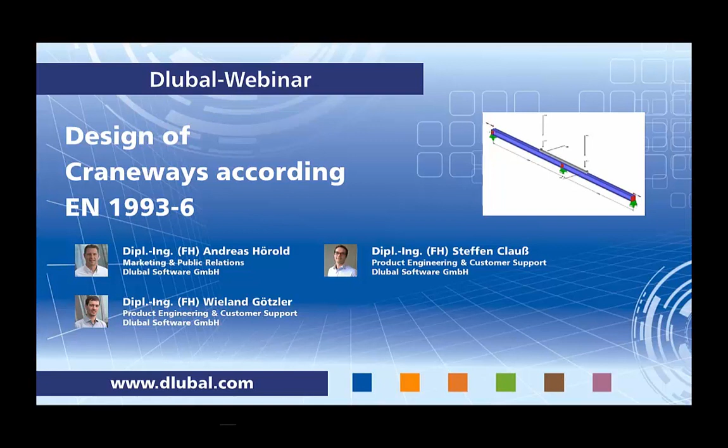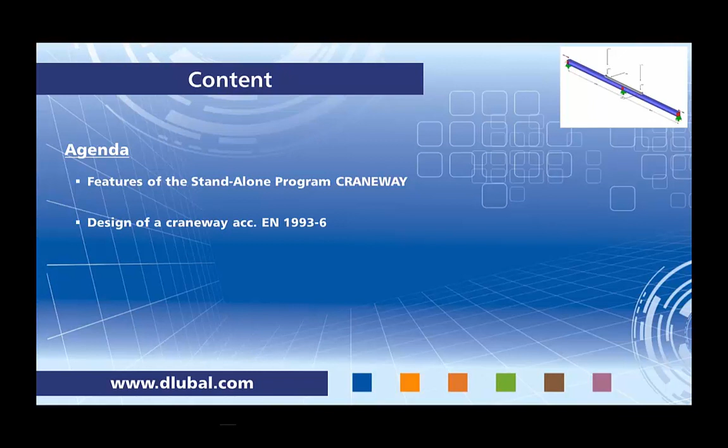Today's content: in the first part I will show you the features of the standalone program Craneway, followed by the design of a craneway according to Eurocode 3 Part 6. So first let's talk about the features of the Craneway program. Craneway is a standalone program, which means that it's completely independent from other programs like RFEM or RSTAB. You don't need to define different parts of the model. You just have to define the craneway itself, and this leads to a fast and comfortable modeling and design.

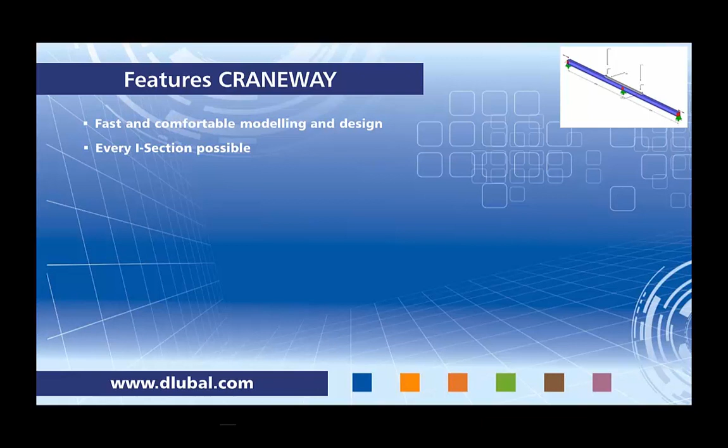You can use every I-section, like welded or rolled I-sections, and you can strengthen them by channel profiles or angles. You can define up to 3 cranes with a maximum of 20 crane axes. And one of the biggest advantages of the standalone module Craneway is that you can have an automatic combination of load cases for different design situations like fatigue, ultimate limit state, or serviceability limit state.

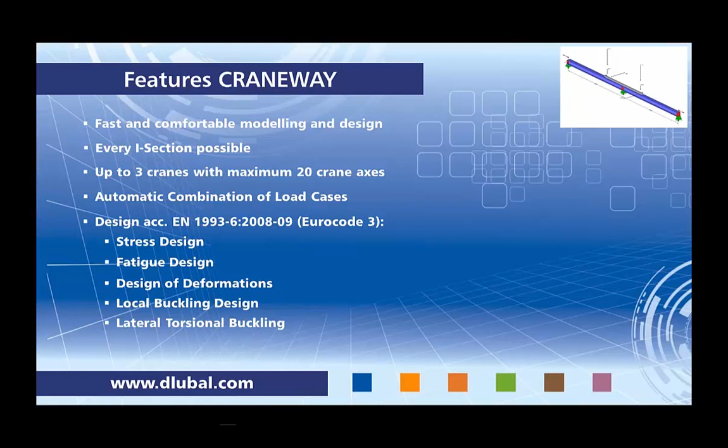The design is according to Eurocode 3 Part 6, which includes the stress design of the crane, fatigue, design of deformations, as well as the local buckling design and the lateral torsional buckling design according to the P-delta method or second-order theory, including the warping of the cross-section. Another big benefit of Craneway is that you can have a presentation of the results in the graphic, like deformations, bending moments, as well as a full printout, which makes a provable static calculation of the craneway possible.

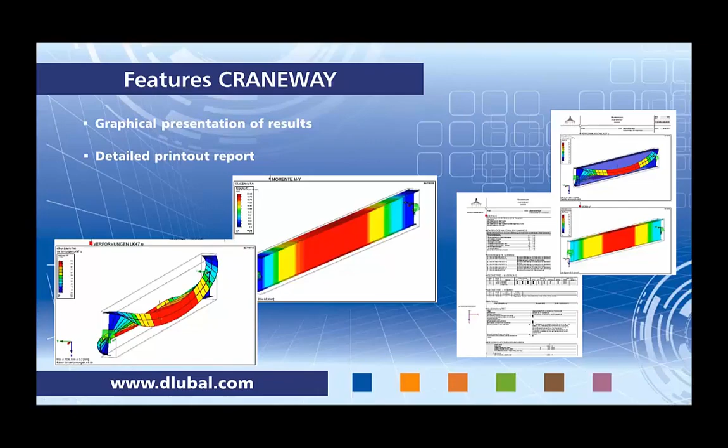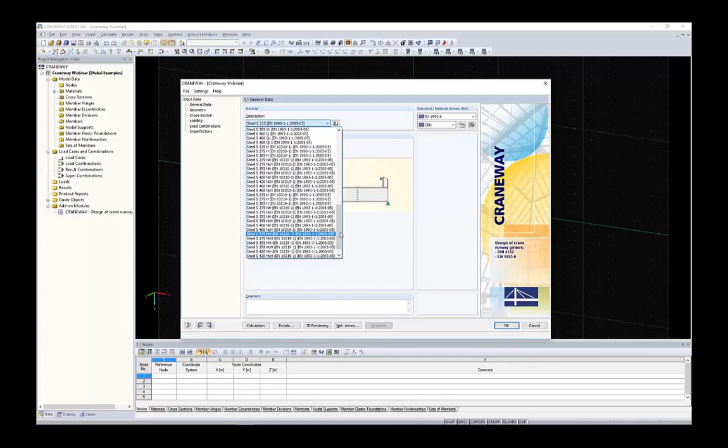Now we will just move on to the Craneway program itself. It might look quite similar to you if you are already using RSTAB or RFEM. So in the first step, I will just define a model. In this case, let's say I want to define Craneway webinar. And in the first mask, you have to define which material you want to use. I will just use S355. But as you can see in the list and also on the link, you can use a material library, as you already might know from the other programs. You can define a new material if you don't find the correct one for your calculation. But in this case, I will just use the S355.

You have a design possible according to DIN 4132 for Germany, and according to Eurocode 3 for the European Union for several national annexes. And if your national annex is not available in the module, you can easily define a new one and change partial safety factors according to your needs. Today I want to define a bridge crane, and I want to define it according to CEN, which means the formulas and the variables which are included in the main standard and not in the national annex.

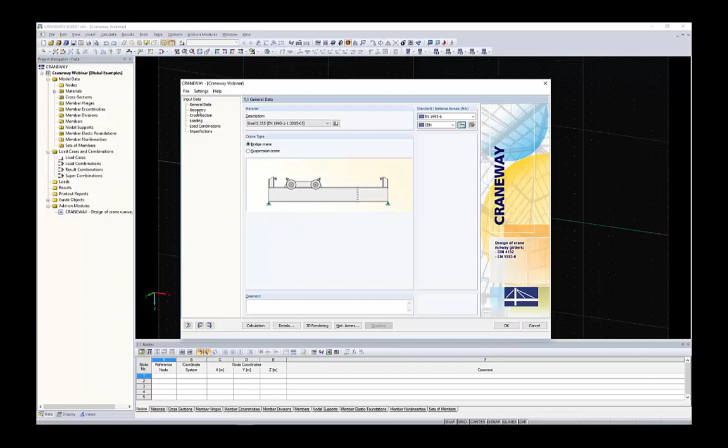In the next step, I have to define the geometry of the craneway. As in the main view in RFEM or RSTAB, you can easily rotate, zoom in, zoom out as you wish, and check your structure. I like to work in isometric view. And today we have an example like a 28-meter craneway. And on the bottom I have to define the supports: we have an intermediate support at 14 meters length and at the end of the craneway at 28 meters.

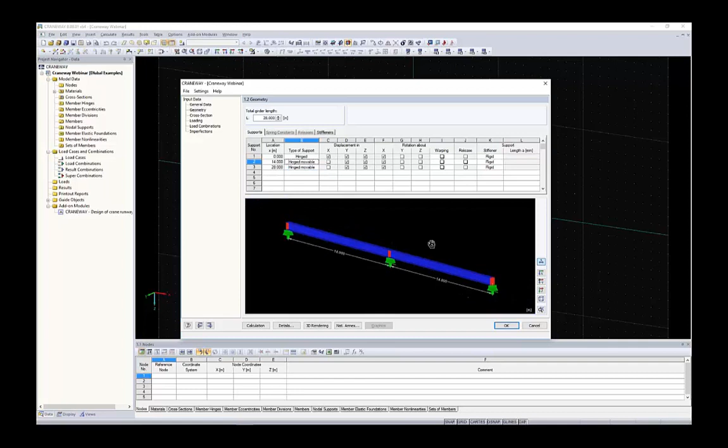There are several standard types of supports like hinged movable as an intermediate support, and it will give you the automatic definition of the displacements and rotations, which is disabled at the moment. But if you want to define a full user-defined support, you can easily use user-defined, and you have access to all the degrees of freedom. You can also use just an intermediate support on the upper flange, and you can check it in the graphic. In this example, we just have hinged movable like this, and we want to define a release in the middle of the craneway like this.

In the next mask, you can also check the releases. If you define a user-defined release, you can also have access to the other degrees of freedom there to, for example, define a shear hinge or just a normal hinge as you wish. I will just use the standard hinge in this example.

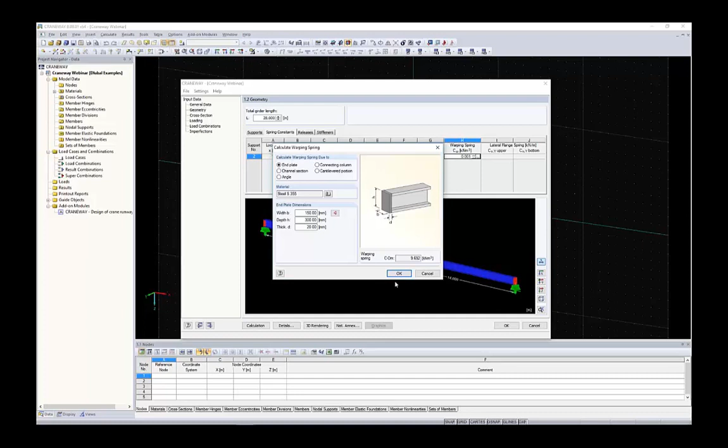You can also use warping supports or hinges as stiff, or you can also define springs in the mask there. And with the detailed dialog there, you can also let the module calculate spring stiffness for warping. In this example, we want to keep it simple, so we don't take the warping into account.

Let me just show you the stiffeners. The stiffeners there are not for the calculation of the internal forces, but they will define the intermediate panels for the design of local buckling. So in this example, I want to have 6 intermediate panels on both sides as regular, or you can even use user-defined and choose whatever distance you want.

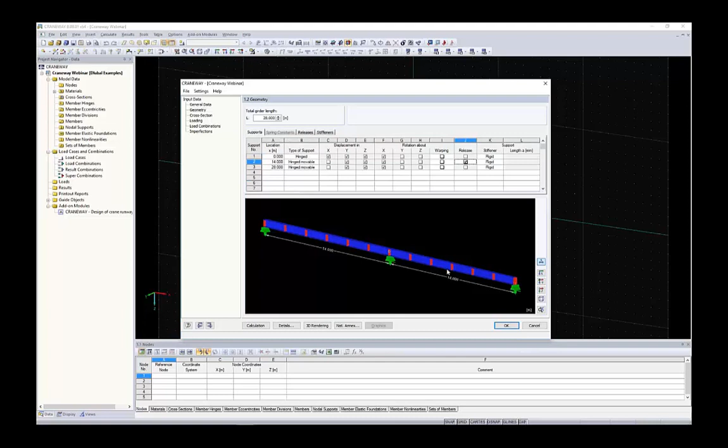Okay, regular 6 panels, and that's okay with the definition of the craneway itself. We can just continue to the next dialog, which is cross sections. There, in the first step, you can choose between rolled or welded sections.

Let me take a look at the rolled sections. You have a filter on the left side for several manufacturers and standard groups. That means you have quite a big library of possible I-sections, for example, ArcelorMittal or standard sections, British Steel, for example.

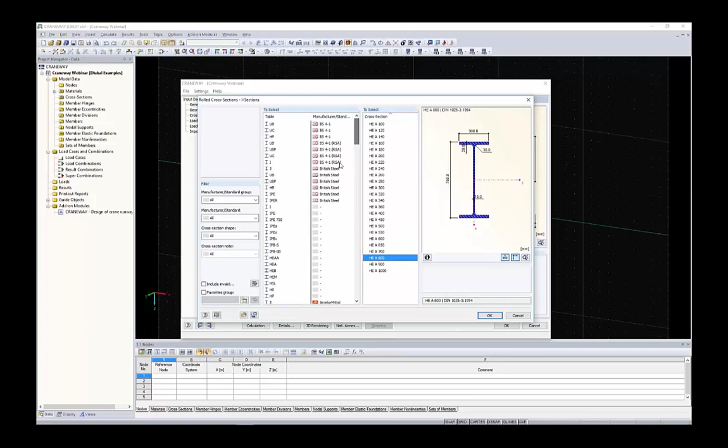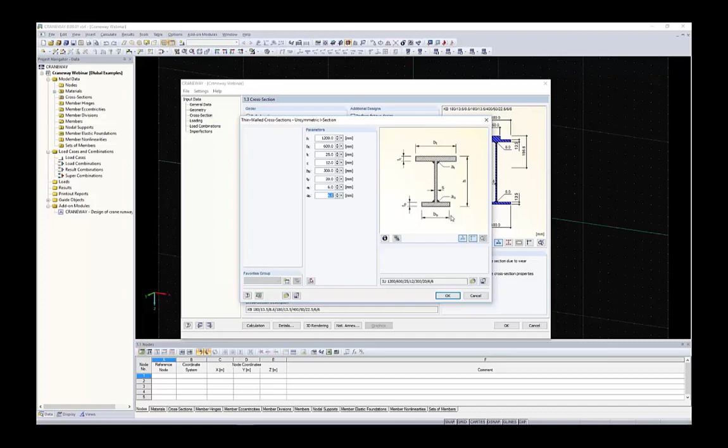In this example, I want to use a welded section, which is quite easy to define. You just have to define these dimensions there, and the example is 1200 millimeters high, 600 millimeters is the upper flange, 12 millimeters as the web. The width at the bottom is 300, 20 millimeters thickness, and the welds both are 6 millimeters. Okay.

The next is to define a rail section. You can use a splice, like a flat bar on the upper flange. As you can see on the right, you can also take a look at the cross section there. Define the splice, or in this example, I want to have an SA 75 section, like this one. Okay.

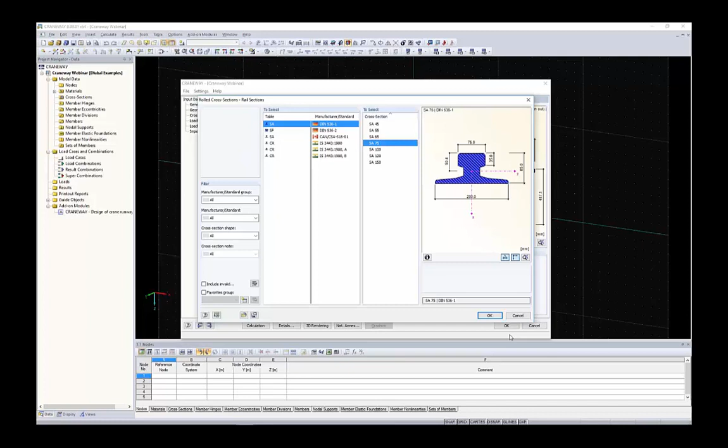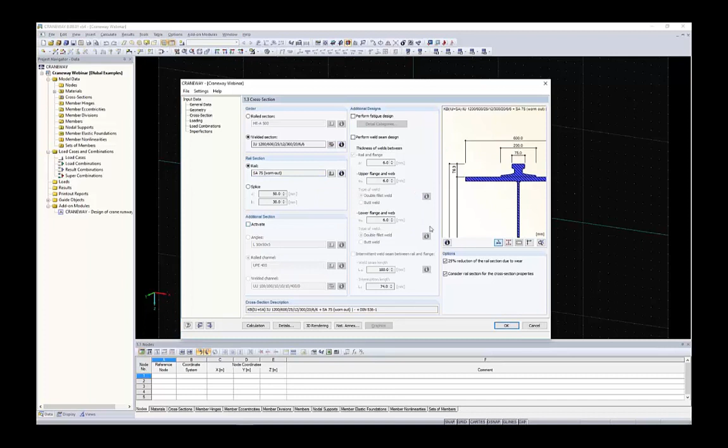On the bottom, you can define stabilizations or strengthening sections like angles on the flange, or rolled sections, which in this case is not possible for this section with a width of 600, but I can easily deactivate it and just continue with this one.

On the right side, you can also see that you can take the wear of the rail section into account, defined by the standard. As you can see, the section properties are modified automatically. You don't have to do anything. You get some info in the section of the rail.

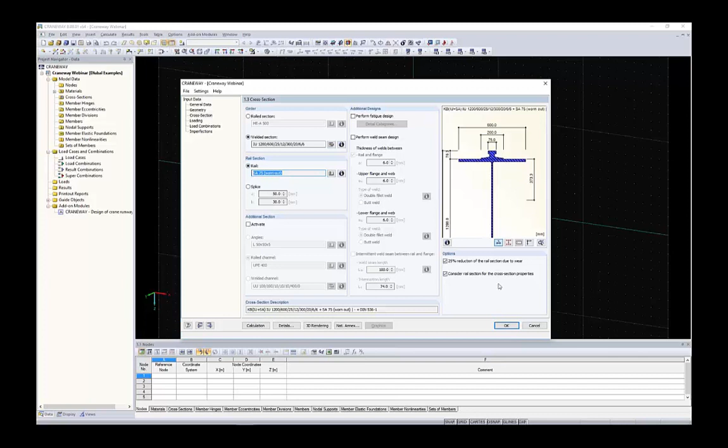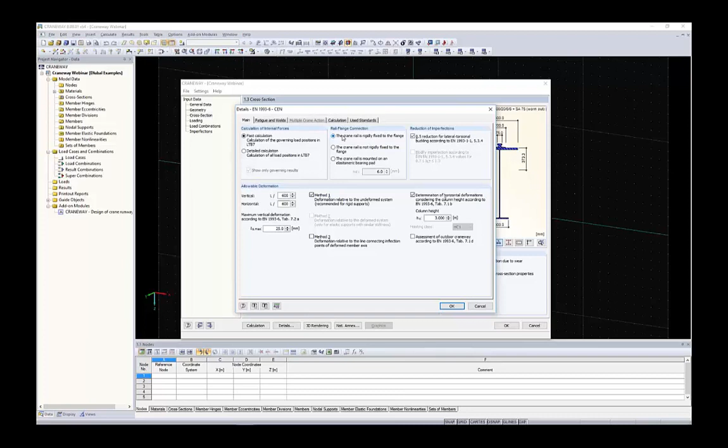And in this case, I have an elastic support under the rail, so I don't want to take the rail section into account for the section properties. I will just switch this checkbox off, and in the details dialog, in the middle of that, you can see that you can define the rail flange connection. In this case, as I said, I don't want to take the rail into account.

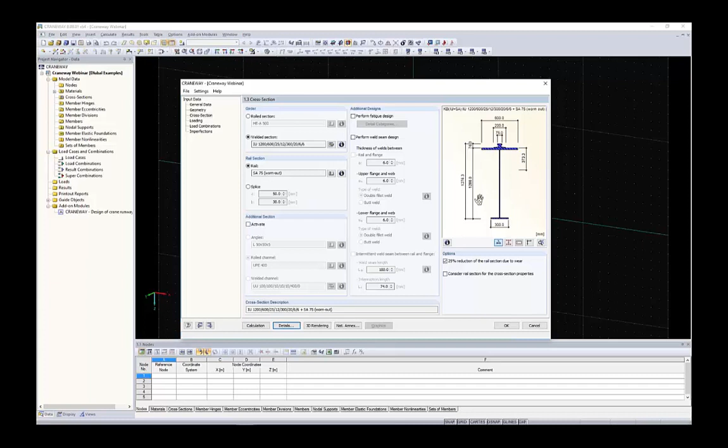That means, as I said, we have an elastomeric bearing pad with a height of 6 millimeters, which is fine. Okay. And with this definition, we can just switch to the next mask, which is the loading.

So on the top of the loading mask, you can define how many cranes you want to design on the craneway. In this example, it's just one. We have a girder buffer on both sides, and we want to design both girders. That means with maximum and minimum loading.

Crane description, this is what you usually get for the static calculation. That means you have a crane you want to take into account, and in this data sheet you will find all the loading, the name, and the S-class for this crane. For this example, I have, let me take a look, a 17 tons crane. The S-class is S5.

And there you can see the dynamic coefficients, which should be clearly visible in the data sheet of the crane, whether the loads you have to define there already include the dynamic coefficients, or they are without.

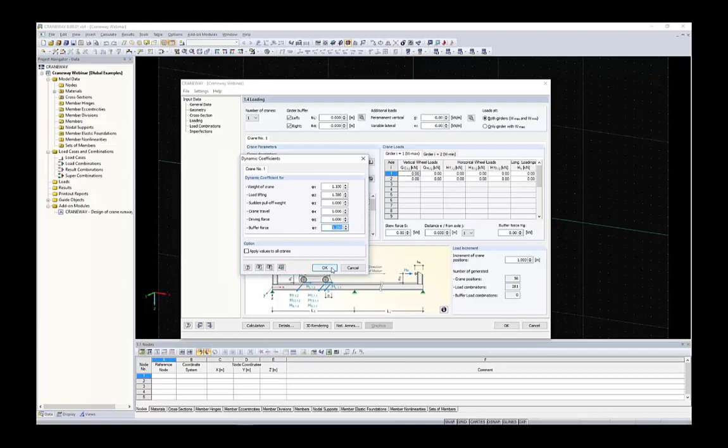If they are without the dynamic coefficients, you have to define it over there. So in this example, I have to define 1.1 as phi1 and 1.38 as phi2. The rest of the values are already okay, like this. And we have a crane buffer of 5 centimeters on both sides.

That means the crane can run from this length along the CRANEWAY. You will see this in the graphic later. We have 4 crane axes in this example, and the distances between the crane axes are 2 meters, 5.6 and 2 meters.

And the loading I have already prepared in a small Excel sheet. So I will just copy the loads from this sheet by selecting all the loads, selecting the cells, and Control V, paste the loads over there. We have a minimum load on girder 2, because I want to design both girders. And we also have an additional skew force, minus 20.1. Okay.

Now on the bottom you can see we have an increment of crane positions of 1 meter, and it means that we have 56 crane positions. And this leads to 281 load combinations. If you define, let's say, 10 centimeters, you get almost 2,000 load combinations.

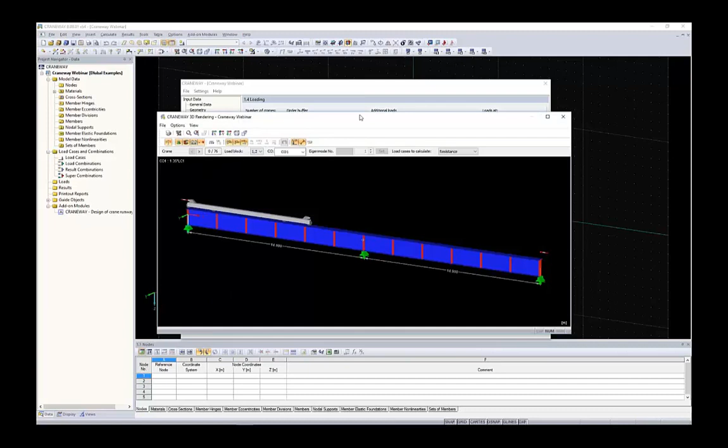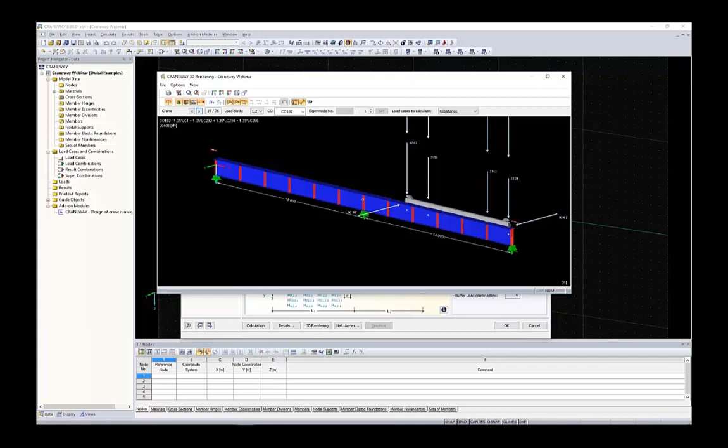And what does this mean? You can take a look in the graphic, the 3D rendering over there, and there you can check the definition of the crane. We have 4 crane axes with these distances, 2 meters, 5.6 and 2, and this is basically the calculation which is done later when you press the calculation button. The program will calculate all the load positions, load blocks and combinations according to Eurocode 3.

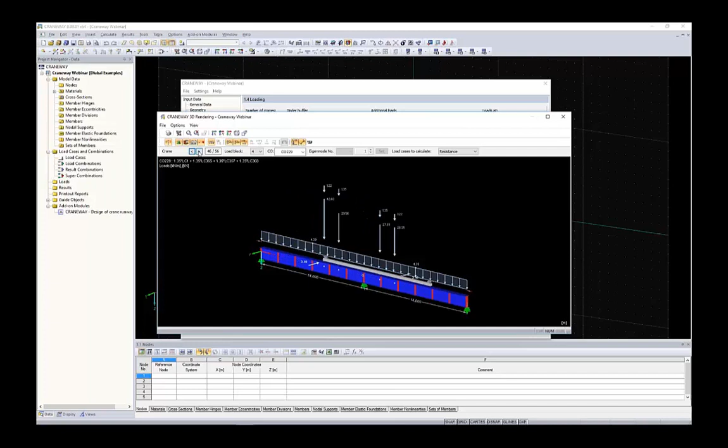When you just switch back and define a buffer of, let's say, 5 meters on the right side, check the rendering again, let me take a look, load block 1 and 2. This is this one, you can see there's a distance of about 5 meters on this side. The loads are not appearing above the support over there. But on the left side, the loads will be above the support at the X location of about 0 meters.

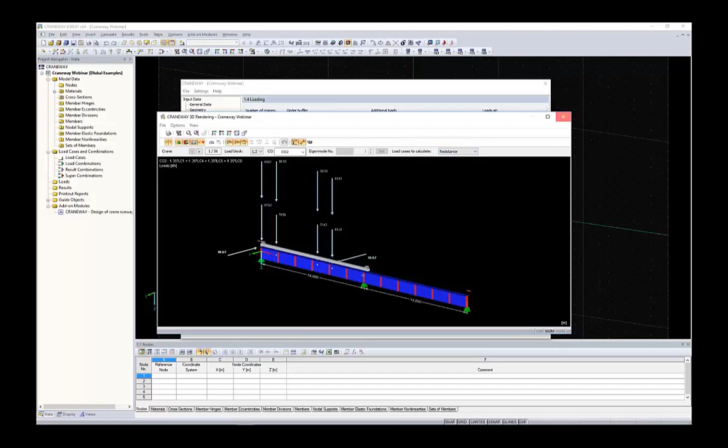So you can check all the load combinations and all the crane positions in the graphic, for the resistance, for fatigue, and for deformations. Let me just switch back to the crane buffer of 0.5 meters. This is also what you can use for the CRANEWAY if you have more than one crane and you want to keep the distance between the cranes. You have to define the buffers.

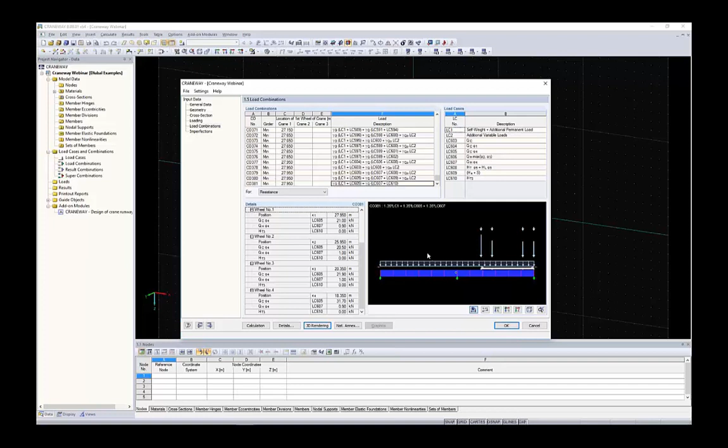So in this mask, I think we are finished and we can take a look at the load combinations. This is more like an overview for you. You can see that for the resistance, you have 381 load combinations with the partial safety factors, with the crane positions and so on. If you imagine doing this manually, it will be really time consuming to get all these load positions and combinations done. In this case, it's a very big advantage, I would say.

Let's take a look at the imperfections. Imperfections you can either define manually in the module, or the program CRANEWAY will define them automatically for you according to the buckling curve, and it will apply the imperfection according to Eurocode 3 automatically. So right now I can just run the design.

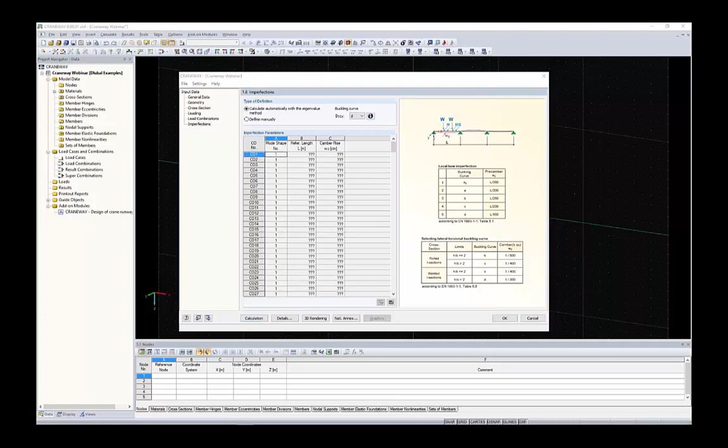It will take some time for the 381 load combinations.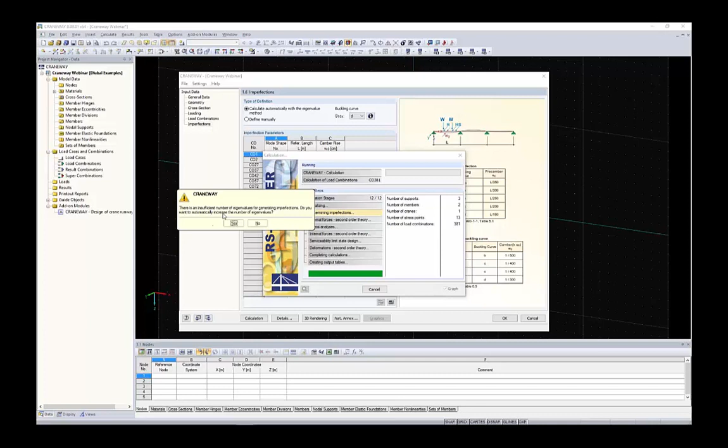There are 2 ways of calculation implemented in this program. You have a fast calculation, which means the design will run according to first order theory first, and then the worst load combinations and design situations will be designed according to P-delta or second order theory calculation method, including imperfections and warping of the construction. If you imagine designing all the design situations and combinations according to P-delta, including imperfection and warping torsion, it would be even more time consuming, and therefore we have a fast calculation and a detailed calculation. If there's a warning hint like insufficient number of eigenvalues, you get a warning hint, and in this case we want to increase the number of eigenvalues.

So this is the 12 design combinations we have. Of course, in this design situation 77, we have to design according to the P-delta method, but it's less than the 381 before.

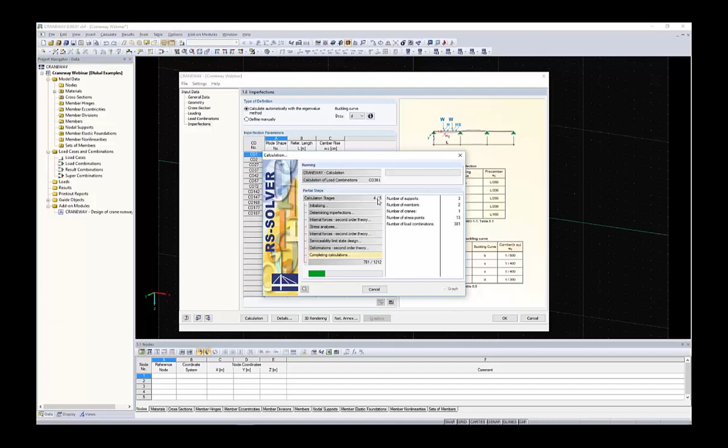Now the calculation finished, and you get a design summary like in other additional modules. For example, Steel EC3, you get results as a design summary, internal forces, support forces, stress analysis, and so on. So in the first step, we want to take a look at the stress analysis, which is fulfilled by this criteria.

We have a governing load combination 142, and you get a full stress design, for example shear stresses, sigma Z, sigma X stresses up to the equivalent stress, which shows that the design is fulfilled.

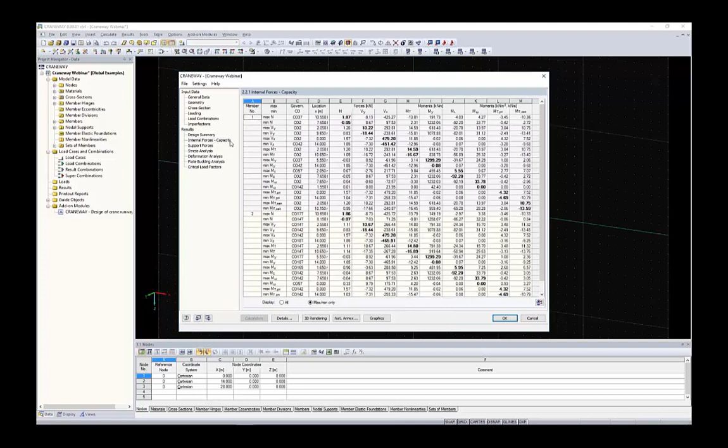You can also take a look at the internal forces as well as the support reactions. And with the File Export Tables button, you can also export these support reactions, for example, to have them for further work in RFEM or RStab.

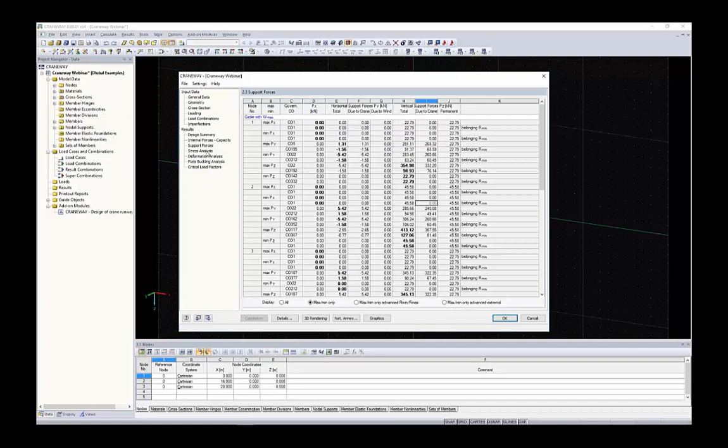You get also the plate buckling design, and what might also be interesting for you are the critical load factors for several load combinations.

The module also gives you the opportunity to get the welding and fatigue design, and this is what I want to perform now. So I switched back to the cross-section mask and activate fatigue design as well as the weld design. We define the weld thickness of 6 millimeters over there in the cross-section.

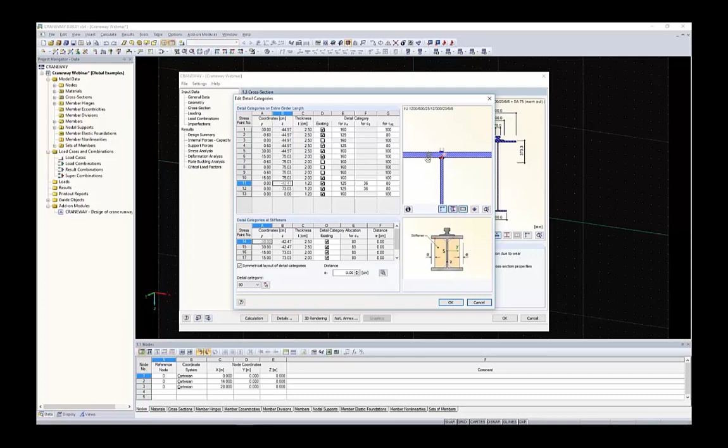First we want to try a double fillet weld. When you take a look at the detail categories, you get all the details for several stress points along the cross-section. You can also check the position of the detail category in the graphic.

When you click on calculation, you can see it's quite fast - it doesn't calculate the internal forces again. And you can see that it's quite overloaded. The fatigue design is about 400% now, and therefore I have to modify something.

You can also take a look at the overloading detail like sigma X, and when you take a look over there, it seems to be okay. But on the bottom you can see the sigma Z stresses, and this seems to be overloaded.

So therefore, over there you can see the sigma Z stress is overloaded, and I have to improve something. What I can do now is switch back to the cross-section dialog, and I will change the weld of the upper flange and the web over there.

You can take a look at this graphic, and in this case I want to use butt welds. That means the web is fully welded through at this position. I just have to change the radio button over there.

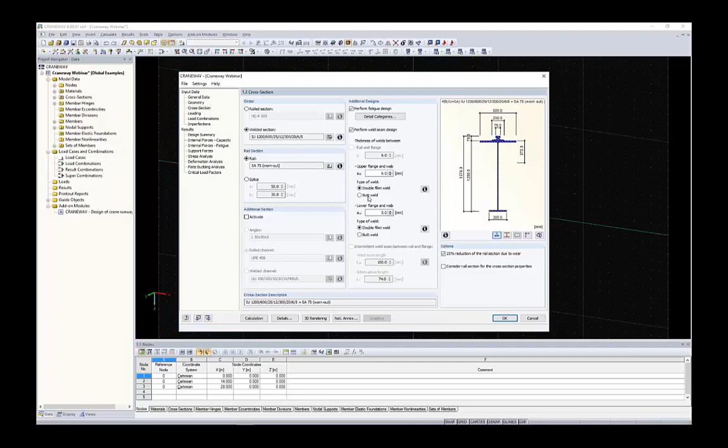This was a small fault because it's still overloaded. I changed the type of the weld on the bottom, but I want to have it on the top of the web. Run the calculation again, and now you can see it's fine.

Fatigue design over there - we can also take a look in the detail of the fatigue, and this seems to be okay now.

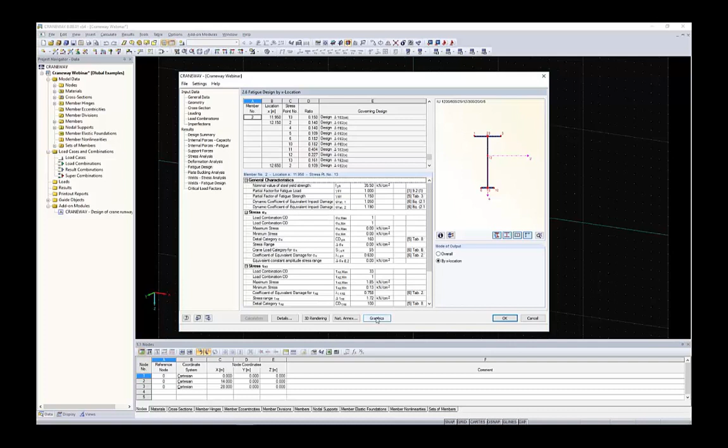You can check all the results in the graphics, but you can also take a look with the button graphics over there to have a bigger view in the program.

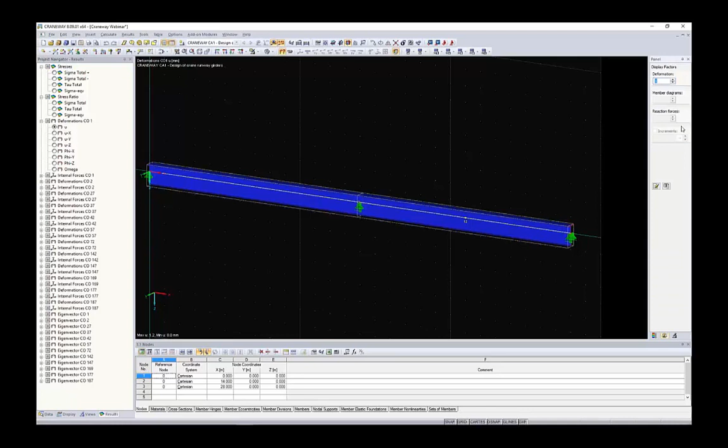You can also change the way of displaying the deformations, for example. This is a sigma stress, so first of all I want to change the deformations to U. I can increase the display factor just a bit, but this looks not very satisfying in this case, because just a line for deformations isn't too useful, I would say.

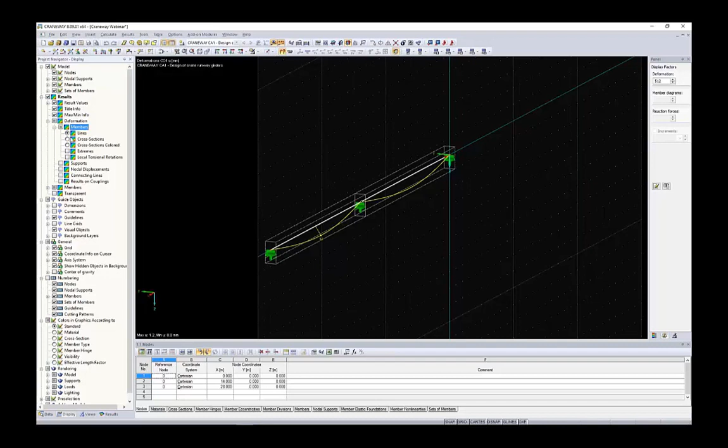So in the display dialog over there, you have the results and you have deformations, members, and you can easily change to cross sections colored. Reduce the scale just a bit, and there you can see that it's lateral torsional buckling.

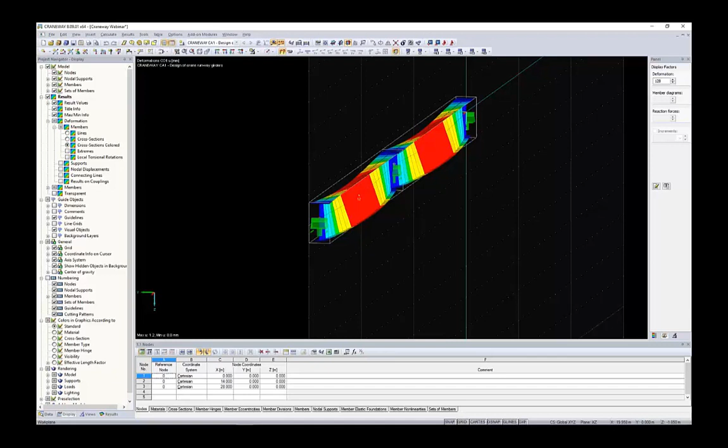It looks like lateral torsional buckling deformation in this case, because I think it's the ultimate limit state, including the imperfection according to the first eigenshape, which is, I think, the lateral torsional buckling.

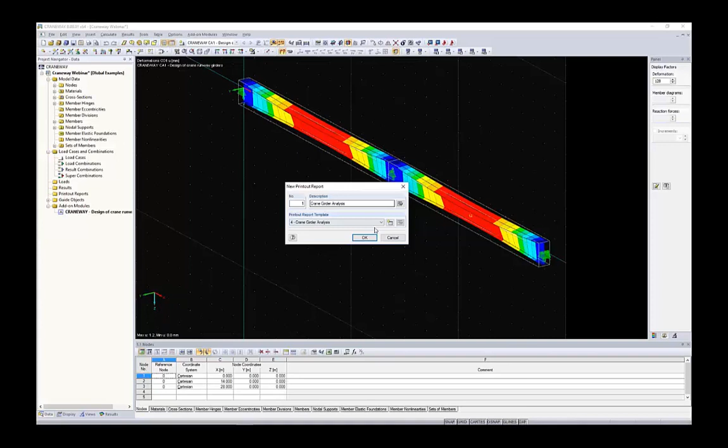At the end of the calculation, the question is how you can send this to someone to prove the calculation, so we will create a new printout report. You have templates available, and I want to use the crane girder analysis as a template. Let's just open the printout report.

As you can see, the printout at the moment is still in German, so let's easily change the language to English. Even in this case, you can have a design according to the English language, and you can also change it to Italian, Spanish, or whatever you want, to send the static calculation to a different country than you are working in.

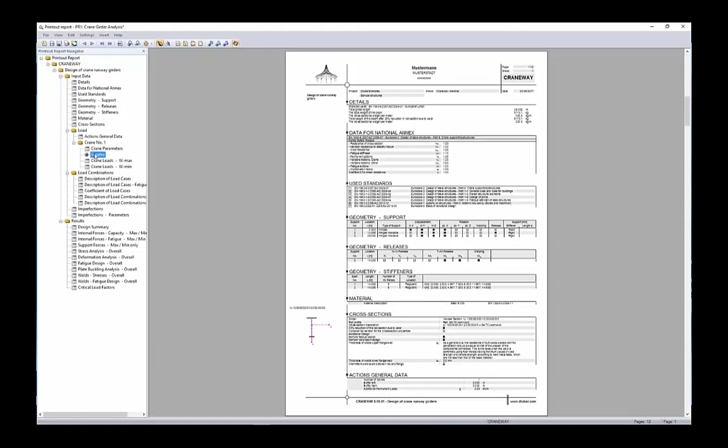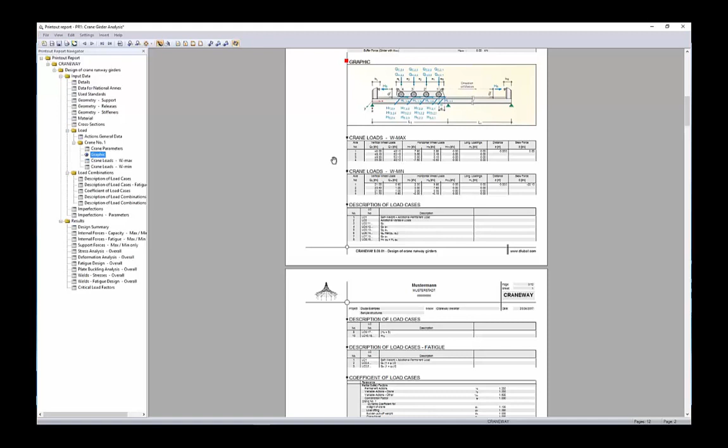Like in RFEM or RSTAB, you get the possibility to print graphics. This graphic of the crane is defined automatically to give an overview of the loads you've defined. When you close the printout report and save it, for example, if I want to have this shape in the printout, you can easily print it to report number 1. I only want to have the current one.

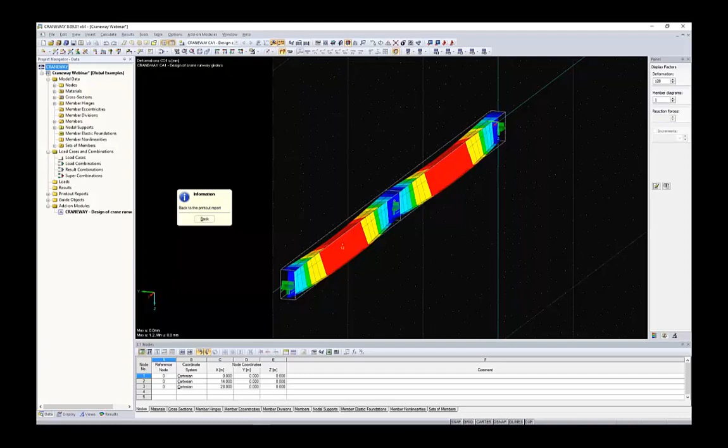Now you get the deformation of the craneway in design combination 1. If you have some mistake, no problem. You can easily click the edit button and change, let's say, to the other side. Zoom in, click to go back to the printout report, and you have modified the graphic.

Let's save the printout. You can also use the mass print function. Let's say you don't want to have only the deformations for combination number 1 — you want more combinations. No problem, you can use the printer button again but change to mass print settings.

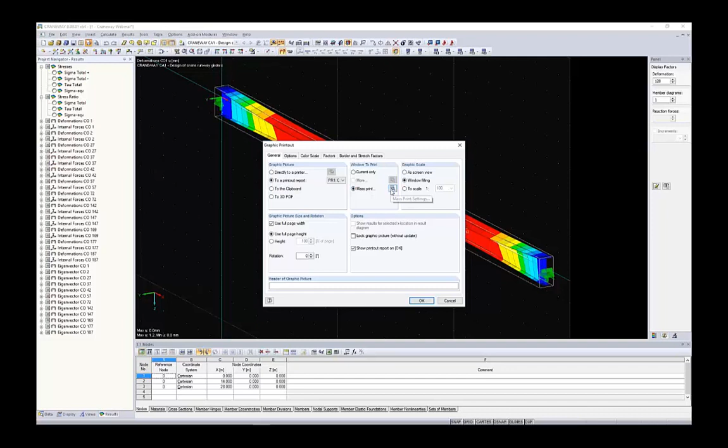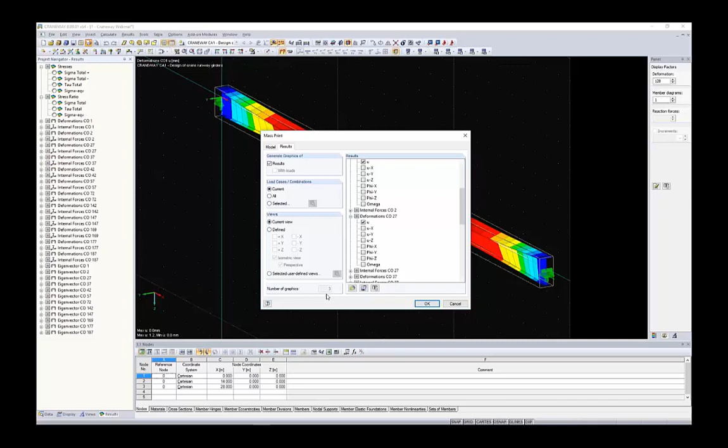I want to have the results of, let's say, deformations for combination 1, deformations for combination 2, and combination 27 of the current view. You can see over there you get 3 graphics added to the printout report.

Window filling, this is okay. Now you get 3 more prints, for combination 2 as well as for combination 27. So you don't have to print each graphic again and again — you can easily print the internal forces, the deformations, just in one process.

All right, let me take a look at the questions you've sent to us.

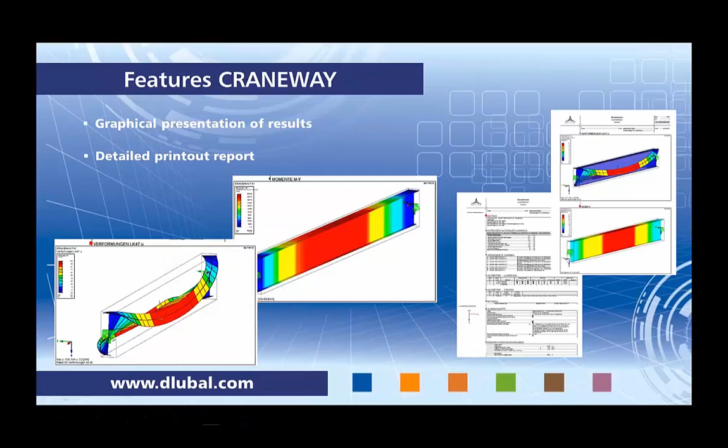Sometimes we get the question of whether you have to define the skew force or the horizontal loads. So I'll switch back to loading, and there you can see horizontal wheel loads for both the max and min girder, as well as the skew force. This is basically dependent on the system. If you define both girders, in my opinion, you should have the skew force only on the minimum girder with the minimum crane loads.

If you design just one girder with this radio button, you can decide whether to define the horizontal wheel loads or the skew force. Because if you design both, it might be way too conservative, and you always want an economic design. So in this example, I've used both girders and applied the skew force on the girder with the minimum loads.

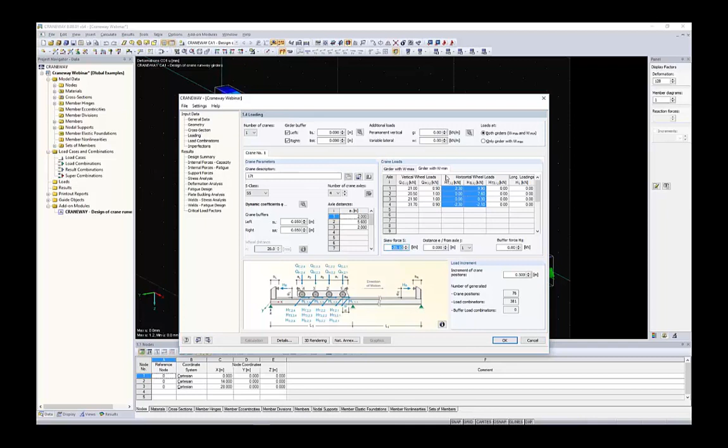So we are pretty much at the end of the presentation. Let me give you some additional information.